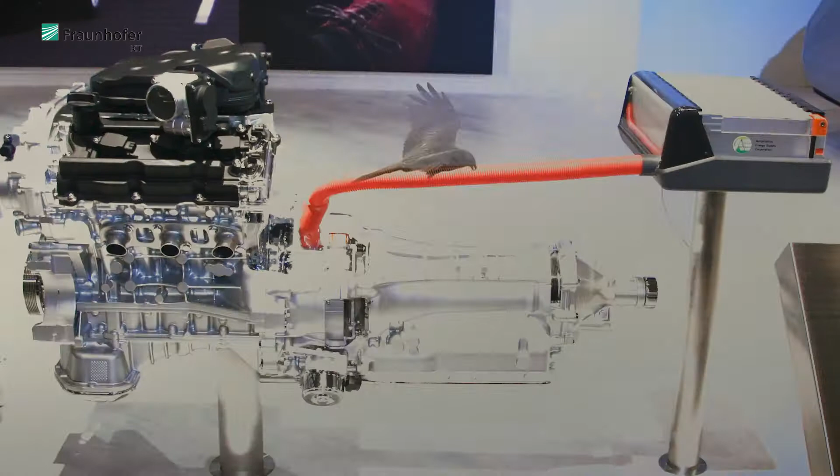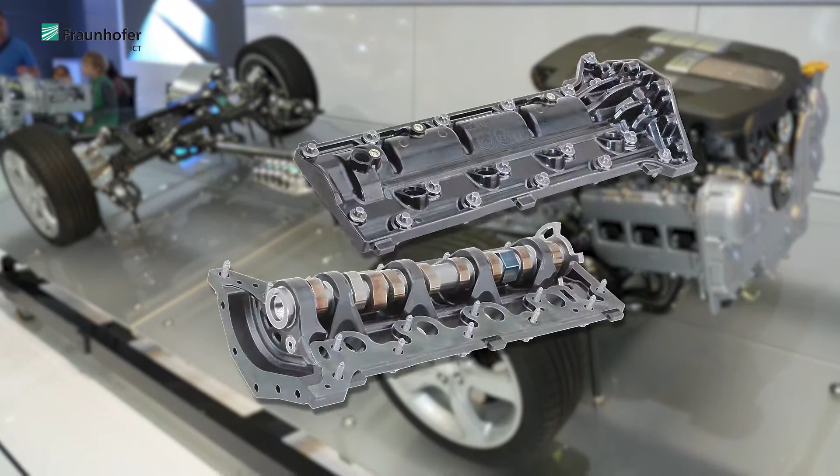Weight reduction is one of the most effective methods to reduce carbon dioxide emissions. Manufacturers and suppliers in the automotive industry are putting great effort into producing powertrains and their components in lightweight design. Currently, however, camshaft modules, which are a key component of powertrains, are still being made from aluminum.

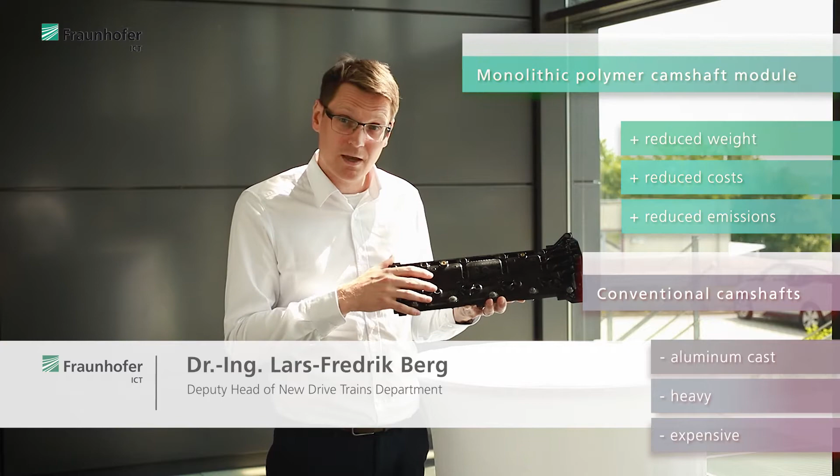This is the camshaft module, which is a part of the cylinder head, mounted on the internal combustion engine. It's situated in the upper part of the engine bay, and therefore it is particularly important to reduce its weight, as it also contributes to the lowering of the overall center of gravity.

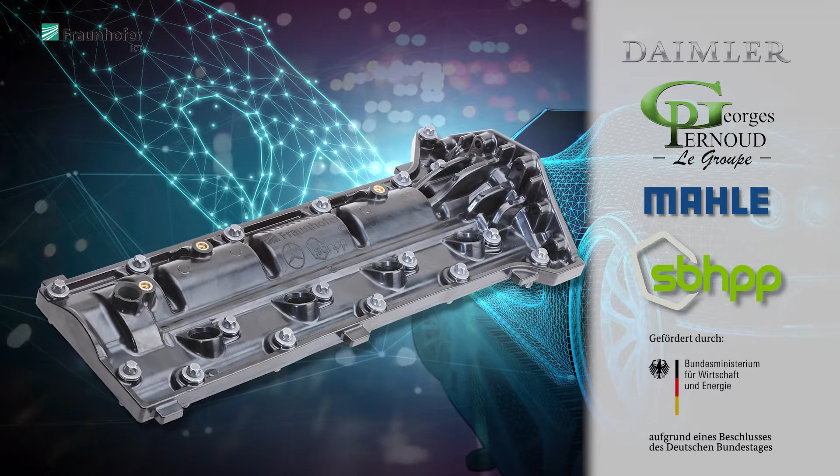In collaboration with partners, our researchers now have succeeded in manufacturing a camshaft module made of fiber-reinforced thermoset polymers. Its lightweight design helps to lower the engine weight and reduces the assembly costs.

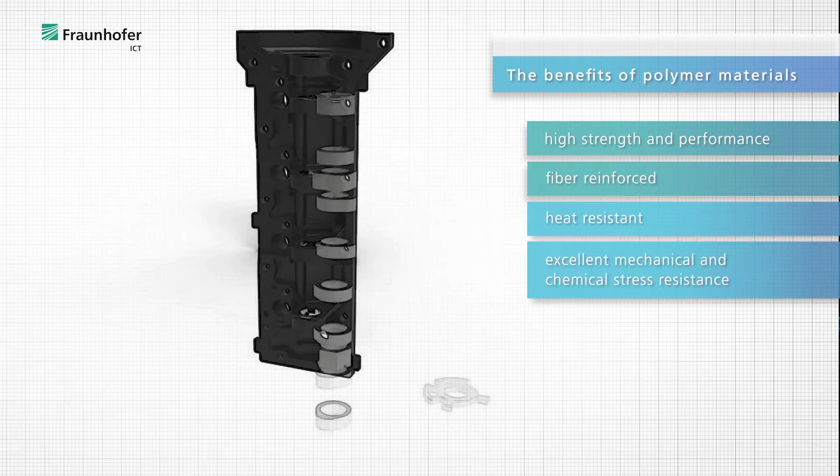In choosing the polymer material, the project partners opted for high-strength, fiber-reinforced thermoset polymers, as they are well able to withstand high temperatures and mechanical and chemical stresses. Our researchers then designed the component geometries to suit the material and the process, meeting all requirements.

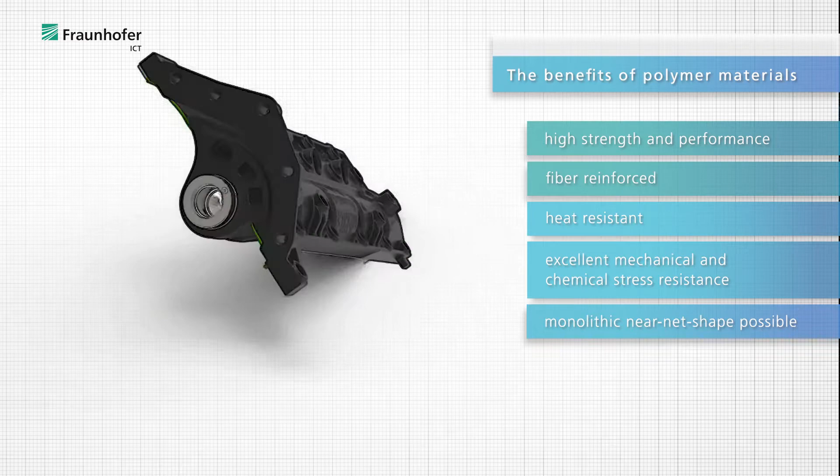Even if the overall stiffness of the applied material is only a quarter of that of aluminum, our designers were able to design the part in such a way that the deformations of the part can be reduced to an acceptable level. The design and the manufacturing process were analyzed using numerical simulation methods.

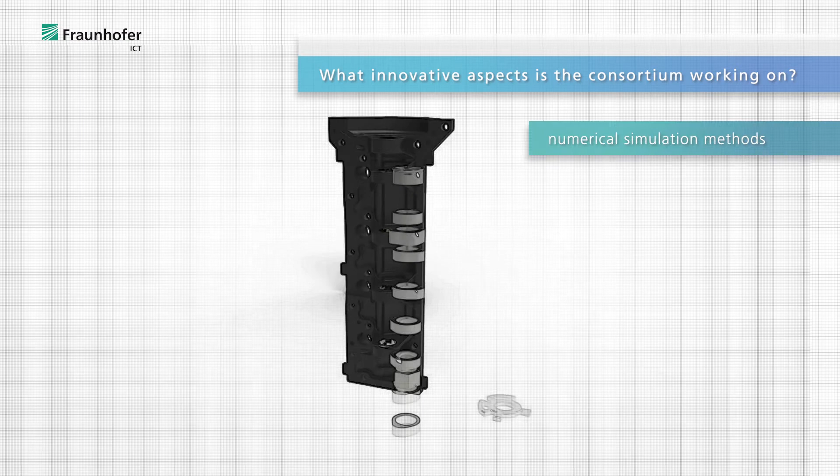For instance, the injection molding process was virtually investigated with a mold filling simulation performed by the material supplier to determine the process parameters and to ensure that there is no air trapped in the final prototypes.

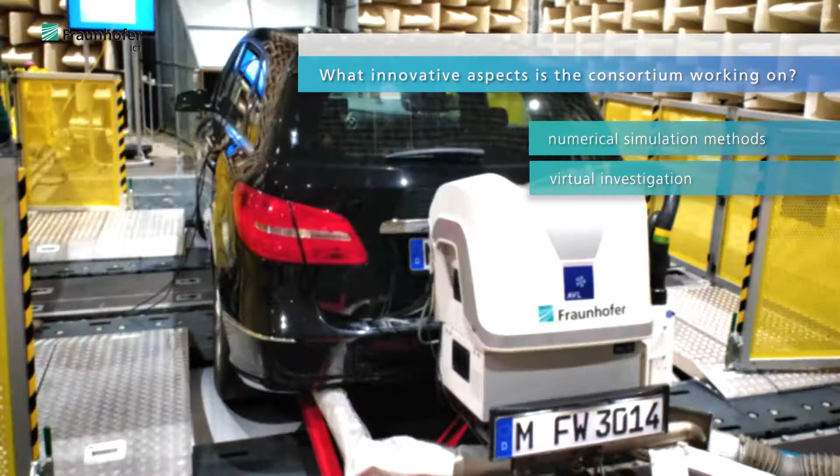The prototypes were tested for 600 hours on an externally driven engine test stand. The lightweight module showed flawless functionality.

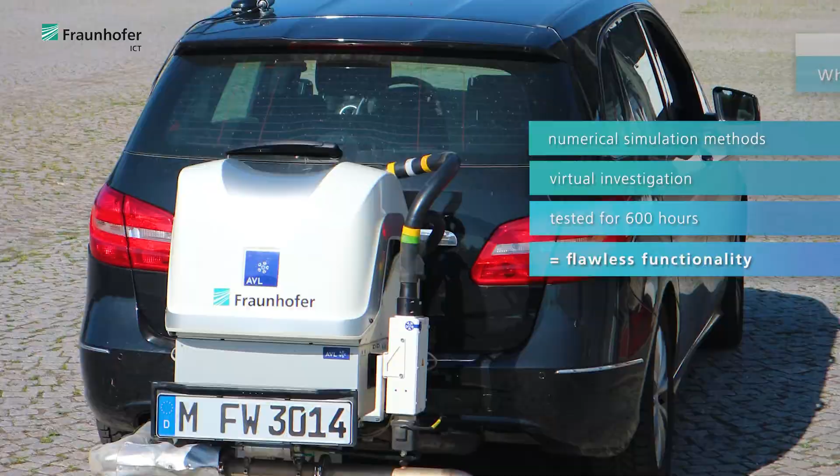With the aid of the planned fired engine tests, the project partners will demonstrate the functionality and the NVH characteristics taking the gas pressure forces of the combustion process.

Besides the weight reduction of approximately 0.6 kilograms, the lightweight module has further advantages. Fiber-reinforced thermoset polymers allow a near-net shape manufacturing, thus requiring comparatively little reworking, which again leads to reduced production costs.

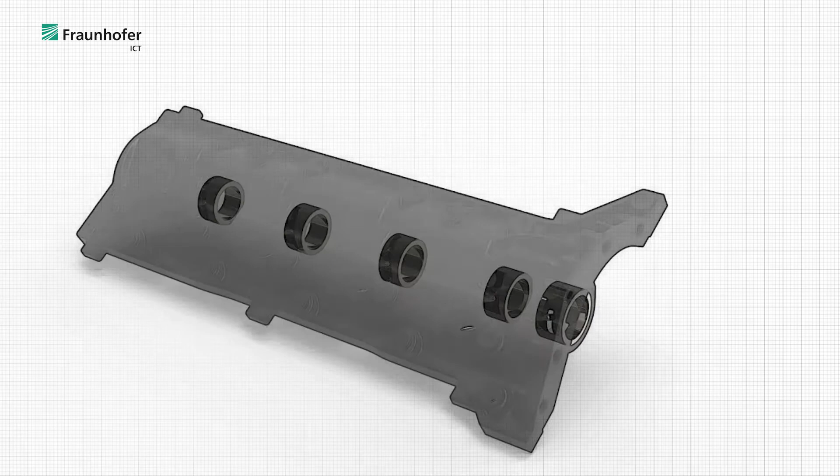Also, at up to 500,000 units, the service life of thermoset polymer injection molds is significantly higher than that of aluminum high-pressure die-cast molds. The camshaft module features a monolithic design with integrated bearings.

In other words, it is manufactured in one piece. Car manufacturers receive a pre-assembled module from their supplier and can mount it on the engine with just a few simple mounting operations, thus reducing assembly time.

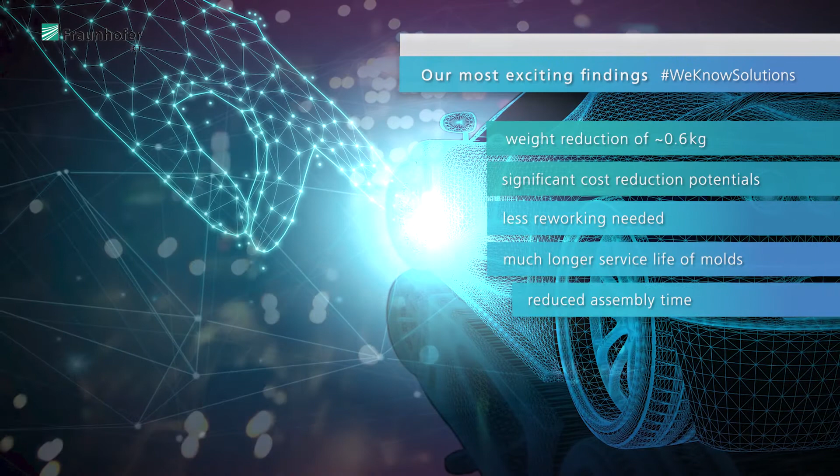And there is another advantage. Automotive manufacturers are eager to minimize noise emissions. Polymers have good damping characteristics, enabling the acoustic performance of the camshaft module to be optimized.

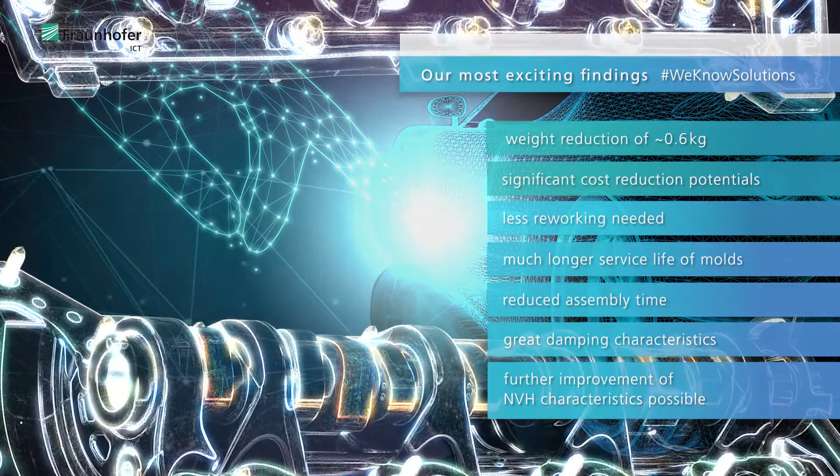In summary, the prototype of the camshaft module demonstrates the great innovation potential of plastic materials.